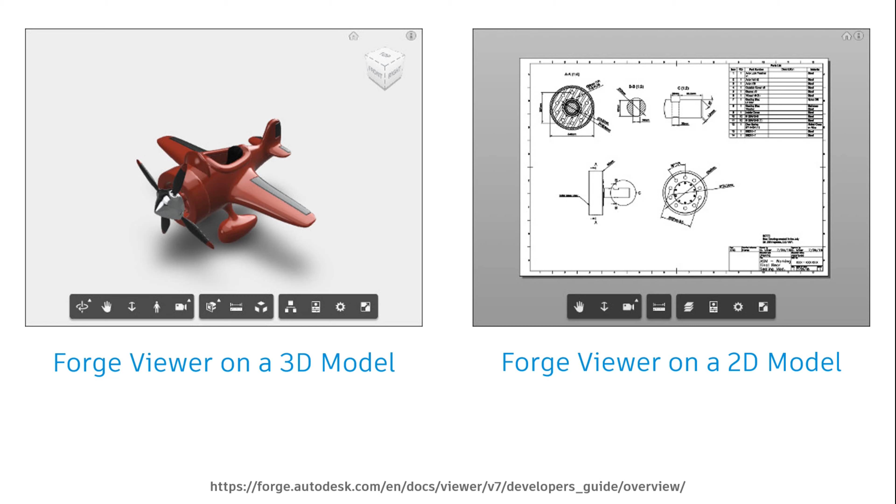All right, so let's talk about BIM 360 now. I'm sure that most of you already know what BIM 360 is, but for those who don't, BIM 360 is this suite of applications under Autodesk Cloud Solutions. It's like this huge cloud platform that contains document management, cost management, coordination, design collaboration, analytics, and so much more.

Engineers, architects, designers, and even stakeholders use BIM 360 on their day-to-day lives to share design intent, to share models, to view metadata, to extract information, create requests for information, manage users, manage issues on the projects.

It's already a converted file from the model derivative API. But, of course, all this is managed under the hood by the application, and the user won't see any of this complexity going on behind the scenes.

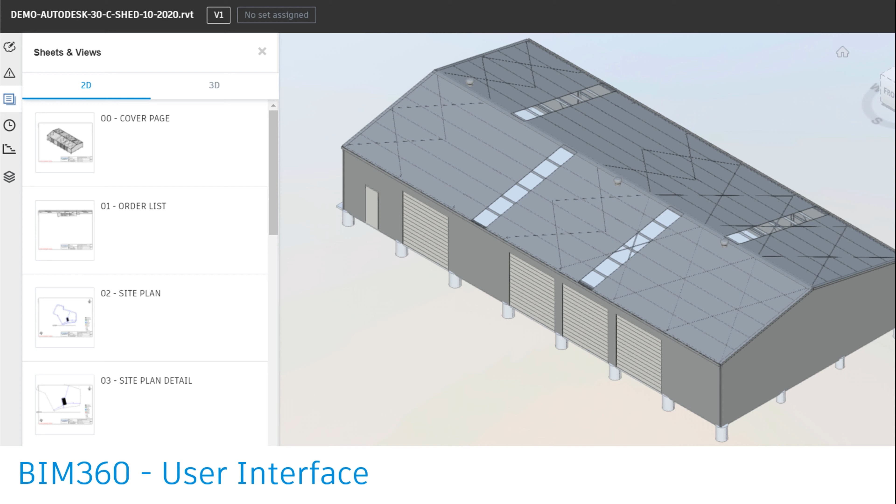So what you can actually do with BIM 360 APIs? Well, a ton of things. You can create and manage projects, add users, create and retrieve folders and files.

The curious thing here is that you are going to use data management API for some of the files and the folder operations. Even if you have BIM 360, you have some merging between their two APIs. It's not surprising, right? Because they're all the same project under the hood.

A very, very important feature is that it has the automatic conversion of files that you upload with no extra cost. If you're a developer and you're building something on top of Forge that targets BIM 360 users, you don't actually need to pay for the conversion of the file. BIM 360 does it already for you, no extra charges.

On the flip side, unfortunately, not all the capabilities of BIM 360 are available in public for Forge. Support for RFIs, for instance, or access to user managements and things like that is still kind of limited. And as you can see there, some of the APIs are still in beta stage, so you can expect to have some limitations there as well.

Let's see how these APIs are put in practice. I have a web form here from Shedmate, the startup that I work for. The form collects information about the project, normal things like client's name, email, addresses, and so on.

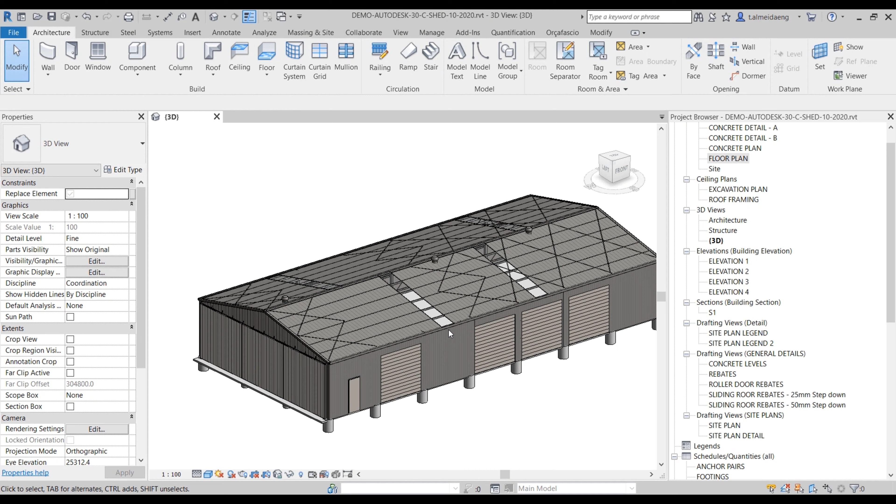So I have Revit open here with the resulting file. You can see that this is a native Revit element with all the elements created. If I select a wall here, you see all the metadata is in there, everything as we configured on the web configurator. If I hide the roof, you can see the frames are created too, and the connections are there.

The anchor bolts, even the overlaps between the frames, all the doors and the framings, the headers, the floors - this one is sloped to the front. We have the footings in there as well, the columns, even the skylights.

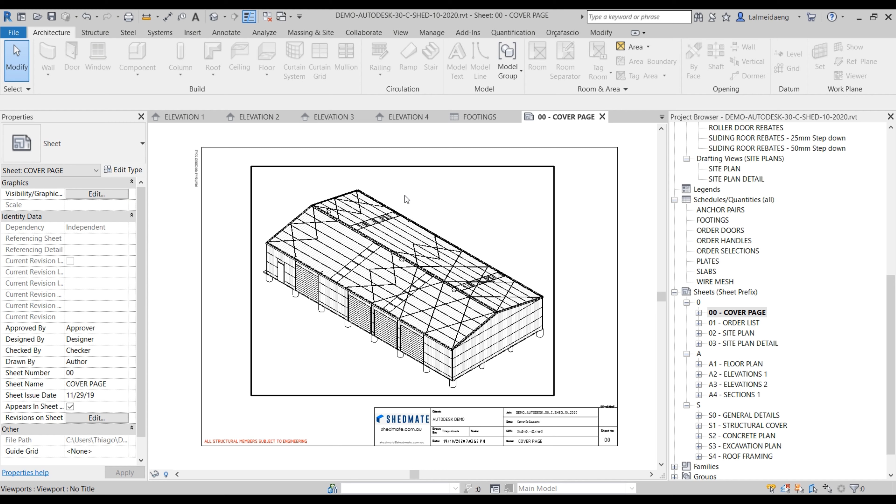Here are all the metadata that we configured on the web form there, so everything ties together in here. Floor plan is placed to scale, and the north position is already configured as well.

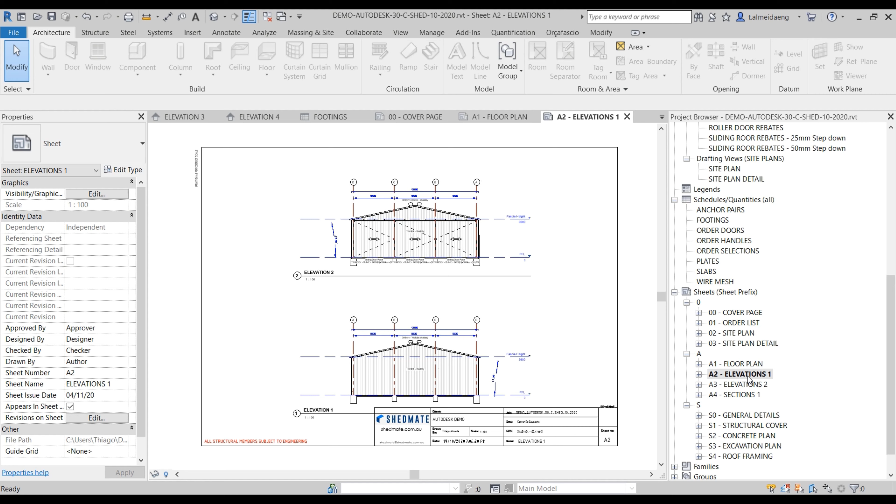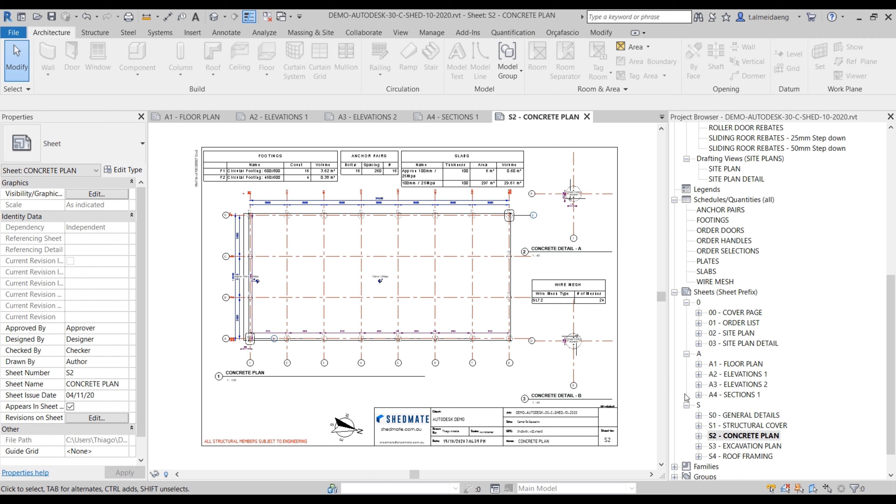Elevations to scale, sides, section views with the spacing for the frames on the roof and also in the wall. Even the concrete plans, the excavation plans, our structural cover - this will be sent to the engineer too. My roof framing in there with tagging for the elements. So yeah, everything is created in a matter of minutes.

Okay, so how did we manage to do all of that? What issues did we find and how did we solve them? Well, too many to explain in this presentation, of course, but let's focus on design automation here. The main thing to focus on is our software architecture.

At the time, we chose to go with MVVM. MVVM stands for Model, View, View Model, and its job is to deal with breaking up your code into separate chunks. For instance, you need to separate your UI, your dialogues, your ribbon panels and buttons, from the actual core logic of your application. That makes your code much more flexible, extensible, and modular.

And I have to confess, we couldn't reach the perfect implementation of MVVM. Even always trying to improve with time, we always found ourselves breaking the rules here and there. Unfortunately, we spent a ton of time coming up with logic to not break the pattern. So that was a big drawback and a big issue that we faced. In the end, it got the job done, but if I look back now, I would go with a different pattern, something like MVC, for instance.